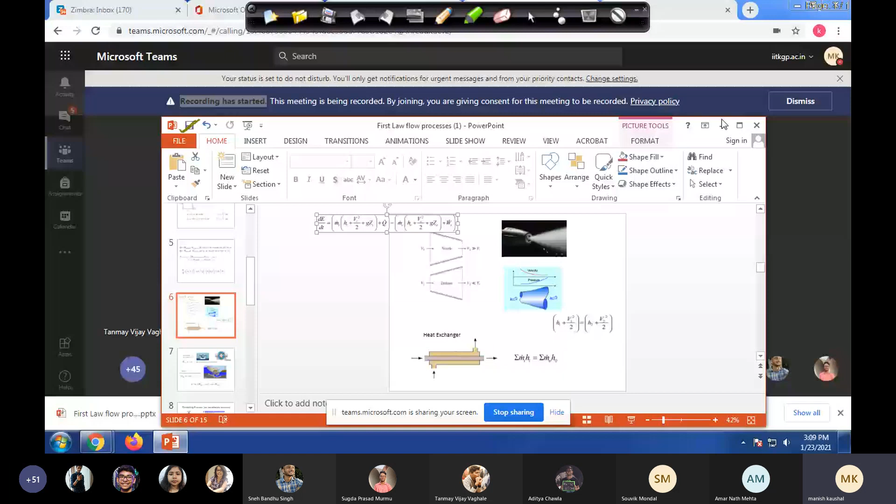Okay, so Tanmay, we derived this energy equation in the last class, right? Yes sir. So now we are going to interact for the next 5 minutes and see the application of this master equation for flow processes, and you will find there are so many industrial devices on which we can use this equation.

So we assume, just for simplicity, that most such devices work in steady state. Not always, but since we are engineers and need a rough estimate, we are assuming steady state. It may not be a safe assumption in all cases, but mostly. So what you see here is a nozzle.

Let me show you how this nozzle works. The top one is nozzle, can you see Tanmay? The animation? Yes sir. So what is happening is the area of cross section is getting narrower as you move towards the flow direction, and it leads to increase in velocity. As you can see in the left hand schematic, V2 is very, very greater than V1. So that is called a nozzle.

So in a nozzle, why do we use it? To increase the velocity significantly. Can you give a practical example of a nozzle from real life? Garden hose, yes very good. So when you want to sprinkle at a long distance or cover an area, this nozzle helps. Sometimes we also use it for atomization, because velocity is so high that molecules get detached from each other, like a small lump of masses breaking up, as in a fountain. So atomization of fluid molecules, you can use a nozzle for that purpose.

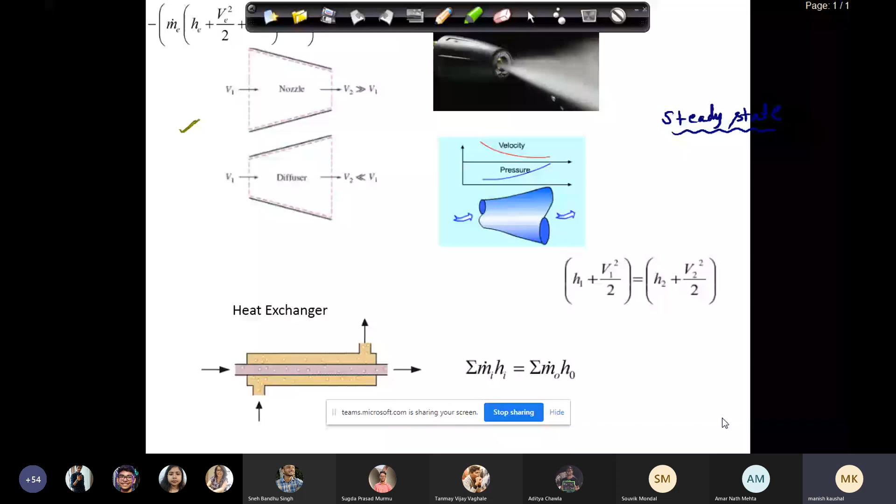So now let's write down. Just below we have the diffuser. Diffuser means this fluid suddenly opens to a larger cross section, so velocity drops down significantly. So this is nozzle, and this is diffuser.

As we discussed, if you remember, if we assume that this nozzle is working in steady state, then what will get cancelled?

At steady state, the left hand side of the equation, dE by dt, will be 0. Now you assume steady state for the nozzle.

Either you can assume it's an adiabatic nozzle, meaning completely covered so there's no heat transfer, or this process is so fast that safely you can assume it's adiabatic.

So then what will it lead to in this equation, Tanmay? Q dot is equal to 0.

Good. And we discussed that since there is no difference in elevation, what will go? So Z1, GZ1 and GZ2 will be gone, okay, right? Yes, fine.

And what about this W dot S? That will be 0 because there is no shaft work, no rotor, right? Yes, so this is gone.

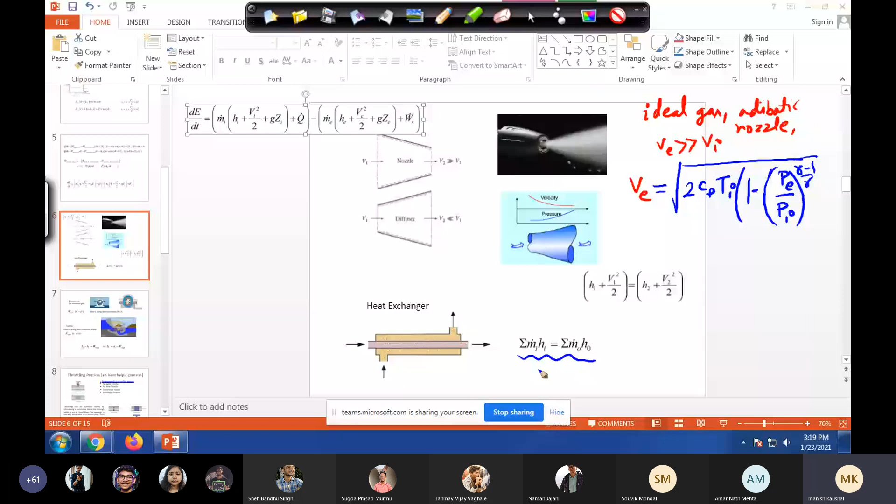Similarly, a problem can be asked on diffuser also. Then we have seen heat exchanger also, and if heat exchanger, the heat interaction is taking place within the system itself. So if you talk about heat exchanger, Q dot is 0, this is 0, all other things are 0. We assume either V inlet equal to V outlet, because generally we use pipe of uniform cross section, or you can simply say velocities are not important in a heat exchanger, they are not flowing at very high speed, so you can ignore this kinetic energy. And of course this elevation is also almost identical throughout the heat exchanger, so we are left with this. And if you have multiple inlets and outlets, there is a summation. This is also very easy.

Now I'd like to discuss something more fundamental, and then we'll go to another device. Or let's discuss the other device first, and then we'll come back to the point I want to discuss. Fine, so this is done. New page, thanks Naman. Now let's see whom we can talk to.

So I was talking to Naman Goel or Naman Jajani. Sir, me, Naman Jajani. So Naman Goel, let's discuss a few things with you. Naman, can you hear me, Goel?

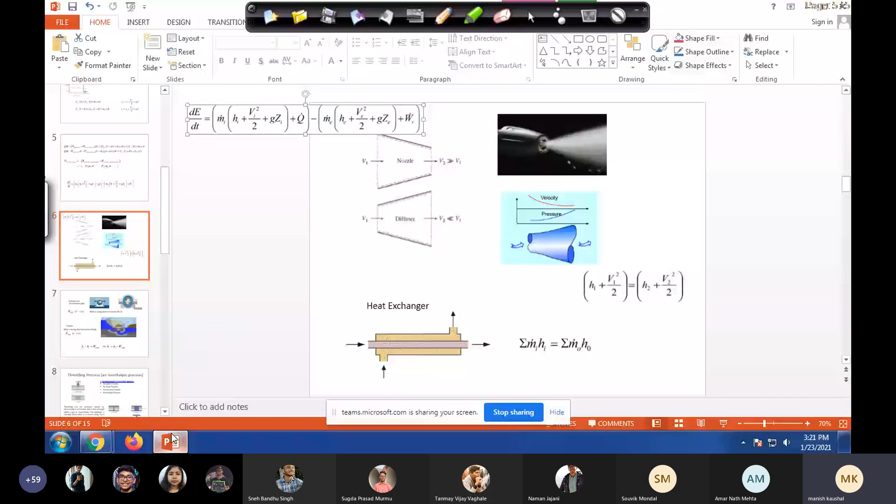Yes sir. Good. So now we are going to see something very important for a chemical engineer. Whenever you go outside, these people will expect these things from you. So let's see what that thing is. Of course nozzle and diffuser is important. Now another very important device you will see is compressor. You will also hear a similar kind of name, pump.

So does anyone have an idea what is the difference between compressor and pump? Yes sir. Am I disconnected or connected? I am connected, right? Naman, can you hear me? Yes sir, now I can hear you.

So the difference between compressor and pump is as follows. Compressor is generally used for gas, remember, because here we compress the gas. Pump is for liquids, we pump the liquid, because generally liquids are incompressible as compared to gas. So then you pump the liquid so that it can move forward. So that is the difference between compressor and pump. But equation-wise, energy equation-wise, there is no difference, and we will see how.

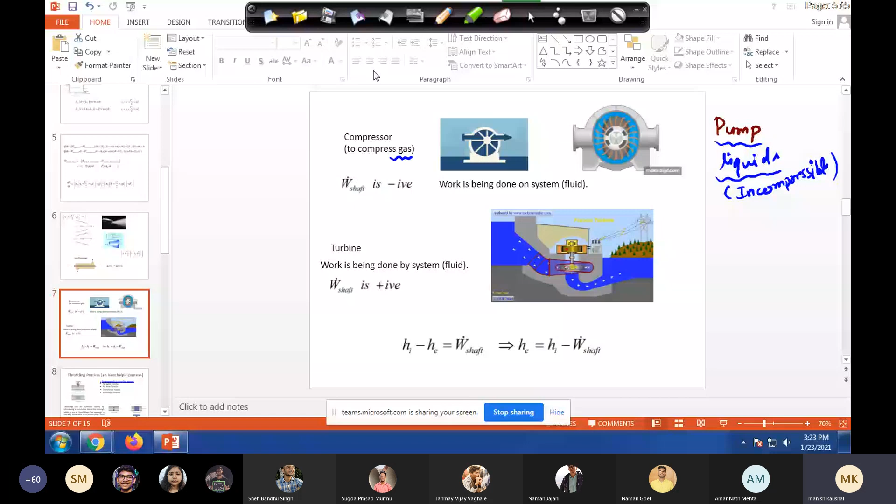So now Naman will help us. Let's bring down this energy equation here, for control volume. Before we move ahead, I'd like to show you how this works, see it carefully Naman. You only see the top two diagrams.

This compressor is working. Naman, you have to respond. Can you see how this compressor is working? Yeah, what is happening?

Consider it as a job interview. You have to be a bit extrovert. Okay, so what is happening? What do you think?

So it's the structure of this rotor, special structure of this rotor, which always traps some gas molecules, right? Due to this blade structure, every time some gas gets trapped between the two fan blades, and then it gets compressed because it has to come out with the smaller volume.

Or you can say that by this way, we always trap the gas molecule and send it to a tank. So you keep on sending the gas into the tank, and if you keep on sending, there will be too much pressure. That's how we compress the gas. You got the point? So this is compressor, right, Naman?

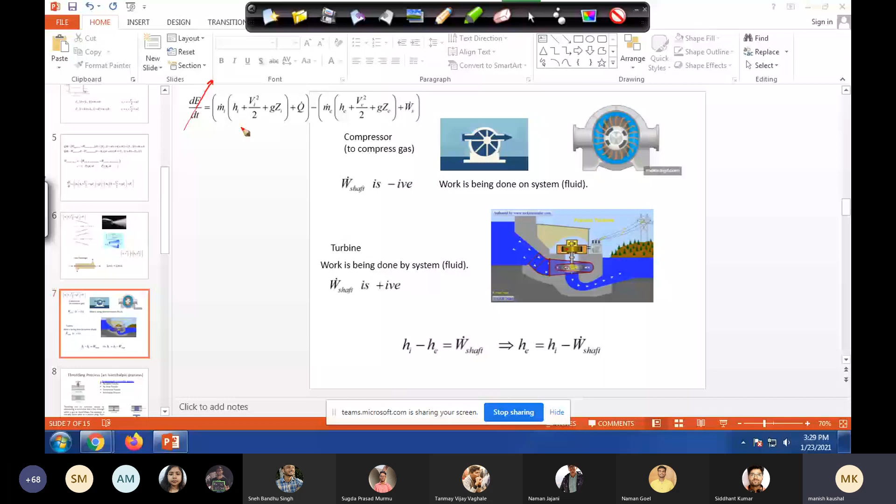Okay, so I am writing rough questions, and whatever I am writing is valid for your exams, because we are doing approximated analysis, right? We are discussing simple cases, and that's how this whole industry works - this industry of compressors, pumps, turbines. We are not looking for very exact analysis, just a rough estimate of energy.

What do you think about Q dot? So generally we say that the process is very fast, or the heat losses are not so significant. So this is also gone, right?

What about elevation? So generally we assume that they are almost at the same level, both at the same elevation. Yeah, so that will cancel too.

Now, I think I missed something here. Since we are at steady state, right, what is the relation between MI dot and ME dot? Anyone? So they would be same, right? So that will be same, time right?

This time you cannot take it out and say it's zero because there is a WS. So the terms which are surviving now are this one, this one, this one with MI and M dot. So what mistake I have made here - I have to write M dot, the throughput. This is M dot, overall throughput or mass flow rate throughout this device. So this is the equation for compression.

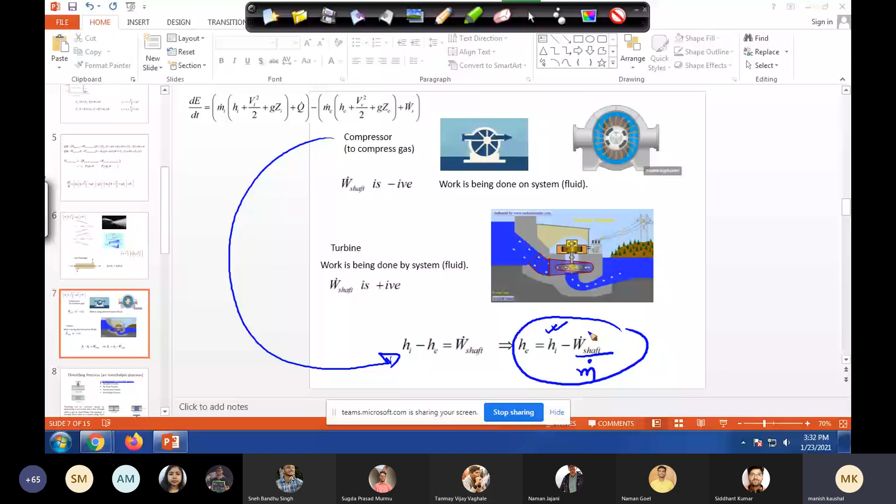This I am talking about compressor. So you have some enthalpy HI at inlet, right? And then W dot shaft is negative. That's what you said, right? You got convinced also, so negative.

It means the exit gas will have more enthalpy, which is according to expectation. If something is coming with some enthalpy, and you are working on it, providing energy, the exit enthalpy should be greater than the inlet enthalpy, right? Not very greater, just greater than. You got it? Yes sir, clear? Got it, okay thank you.

Now I'll go to someone else. Thanks. Now we'll go to turbine. Let me see with whom.

So Rakshit, you can hear me? Rakshit. Acha, Pratik, you can hear me? Pratik Kumar. Pratik. Yes sir, yes. Sorry, I'm a bit loud, sometimes I sound a bit louder. Don't mind it. Okay.

So now we are going to discuss turbine. So now you see this diagram in the bottom, this GIF, this animation. What do you see? What is happening? Can you guess? Do you know what is the purpose of turbine? Yes sir, to produce electricity.

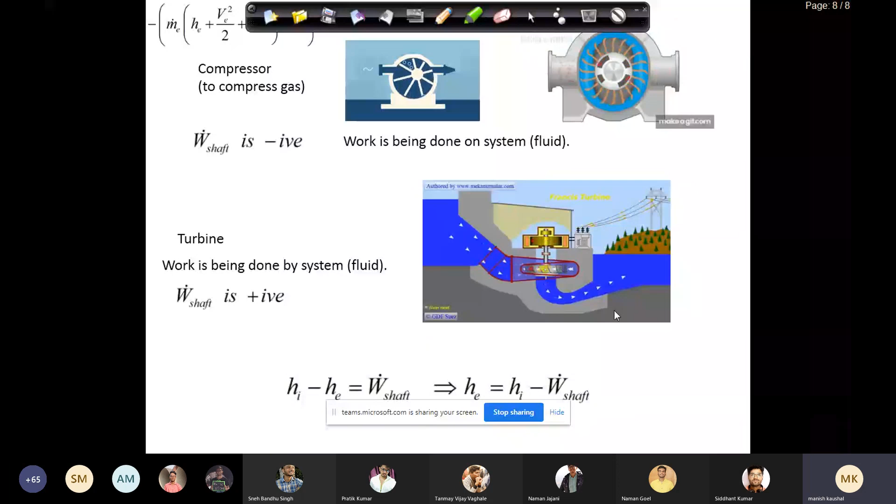So it means that fluid is rotating the turbine, right? Yes sir. So it means this time fluid is working, right?

Sir, if fluid is working, then it is positive. So that's what I have written, right? Yes, but otherwise there is no difference in the equation. Same equation is valid for turbine also.

Yes sir, this time since W dot, and again here it's M dot, by M dot. So since this time W dot shaft is positive, something will get deducted from your inlet enthalpy, right? Yes sir, and that's what we expect, that since your fluid is working, that part of energy is going to electricity, not 100%.

There is something called principle of degradation of energy, which is related to entropy. We'll see in detail in second law. So that part is going to electricity, and that's why the fluid which is coming out from the turbine, its enthalpy will be lower than the inlet enthalpy, right? Yes, understood? Great.

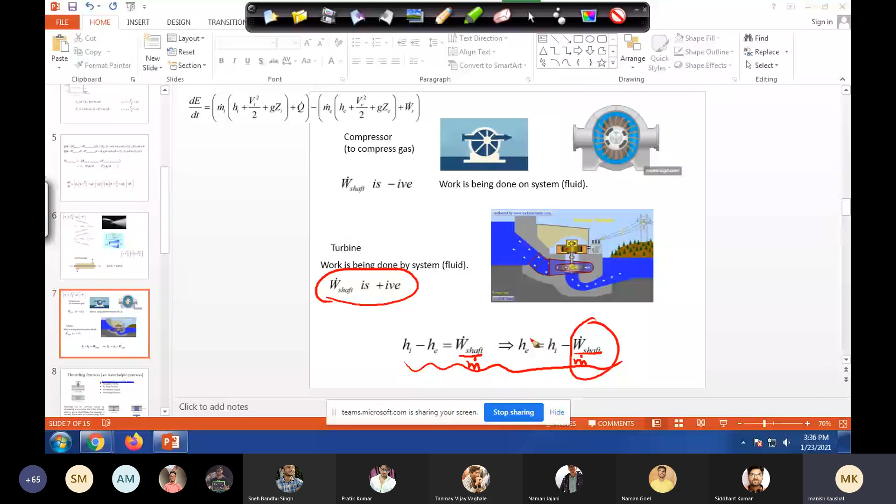So we have seen nozzle, we have seen diffuser, we have seen compressor or pump, we have seen turbine. What is interesting here, you should notice, is that in various devices, various terms are important. For example, in nozzle and diffuser, what is important is enthalpy and velocity, kinetic energy, right?

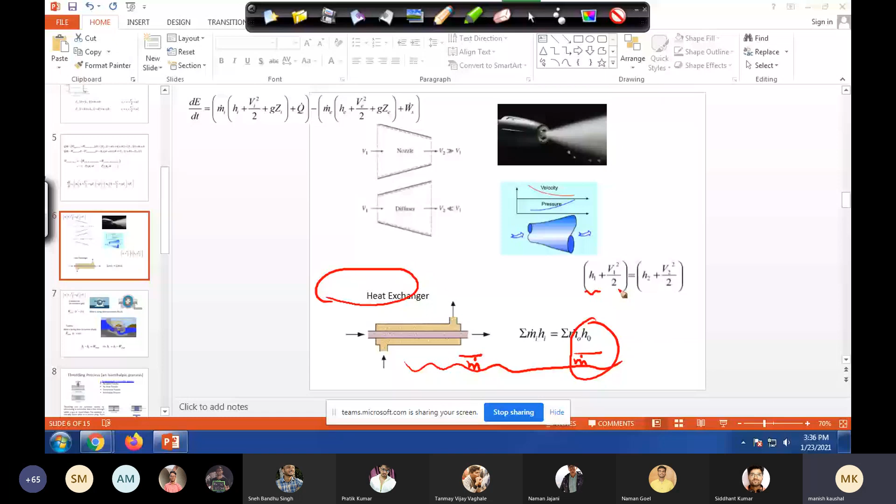So in nozzle and diffuser, what is important is enthalpy and kinetic energy. Whereas in heat exchanger, only enthalpies are important, and of course mass flow rate. And then when we go for compressor and turbine, what generally is called shaft-based devices, here apart from enthalpy, what becomes important is shaft work.

So you have to notice one thing: enthalpy occurs in all these equations, and that's why as a chemical engineer, enthalpy becomes very important for us, especially in thermodynamics. Enthalpy plays a major role.

Who's calling me? Sir, I have one doubt. Yes please. Sir, in heat exchanger, since we are working at steady state, mi dot equals me dot. So that simply means hi equals he?

Why so? No, it's in the previous page of heat exchanger, where you have written summation mi dot hi equals summation mo dot ho, fine. No, but this is only for a heat exchanger, na? Yes sir. Oh, you are saying mi dot equal to m dot?

No, no, no. See, that is valid for one pipe, right? Here in heat exchanger, you have always two pipes. In other devices, you have only one pipe, one flow line, na? But here you have multiple flow lines. So that is the difference.

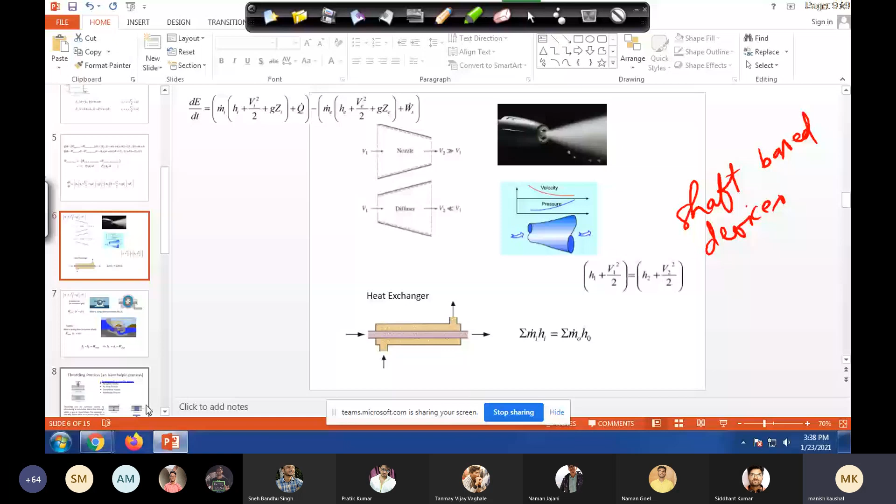Okay, so don't forget to correct it, it's W dot shaft. So what I was saying is that this enthalpy occurs everywhere, and that's why in thermodynamics we are used to make tables in terms of enthalpy. So in all these equations, enthalpy occurs.

Now, whether this enthalpy change will be due to heat exchange or due to shaft work, or it will change the kinetic energy, based on that we have various devices. In fact, for various devices, we got these various cases. Now, something very important.

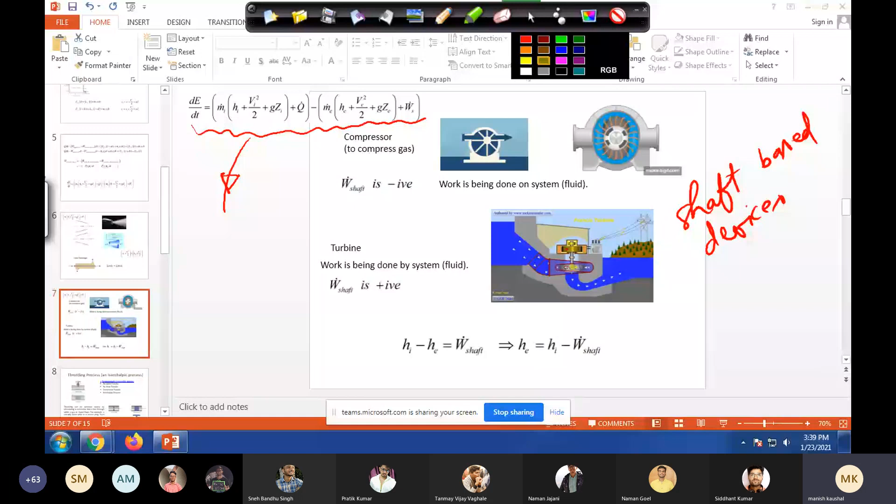We will see whether we can reach from here, this thermodynamic equation, to - have you ever heard any other equation similar to this? Bhavna, you are there? Hello?

So have you ever seen any other equation? Not very similar, but something like this - it's an energy equation. Any other energy equation? Yes sir, we have seen Bernoulli equation, have similar terms.

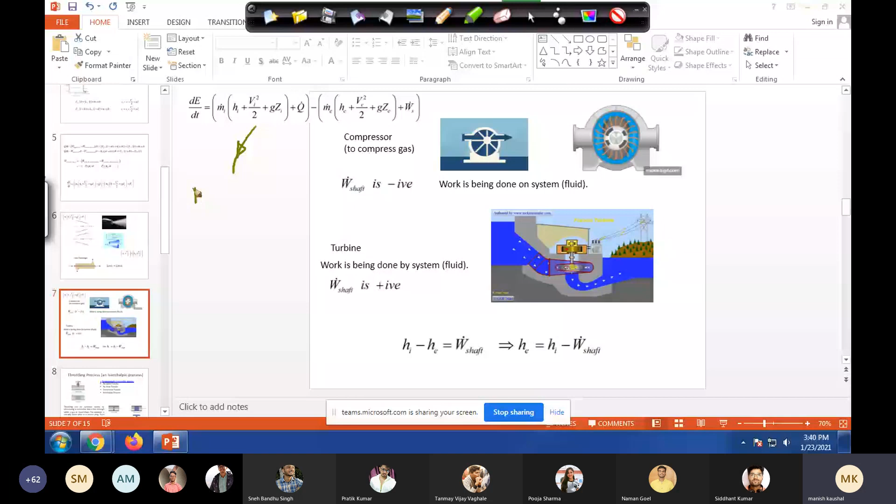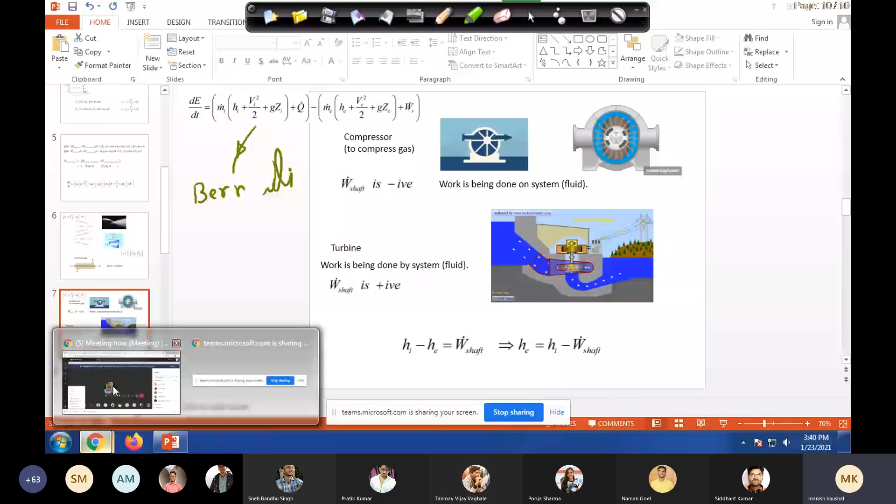Good, Bernoulli equation. So let's see, by the way, what is it's spelling, right? I always get confused, is it O? Is it correct or wrong? Bernoulli's - can you? I always get confused with this spelling of Bernoulli. Let's check it, I have doubt. I tried many times, but every time I forget the spelling of Bernoulli.

Okay fine. So let's see whether we can reach to this equation or not, and I will show you something very interesting here. Of course, in Bernoulli equation, we assume steady state, incompressible. Anything else you think? The assumption, if anyone remembers. If not, we will see what we need to add here. So I thought I should show you that from here also we can reach to Bernoulli equation.

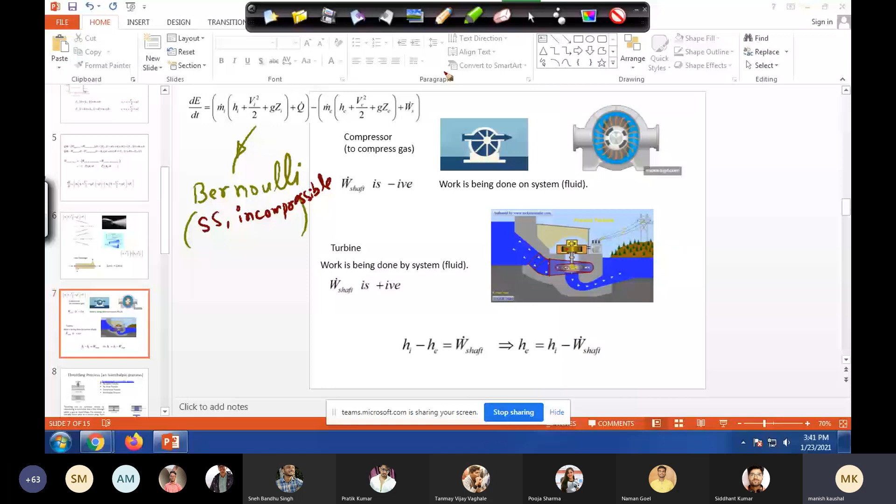Okay, let's see how. So as you are saying steady state, this term is gone. And generally we apply Bernoulli equation through one flow line. And since we are talking about steady state, this mi dot and me dot is equal to throughput rate m dot, fine.

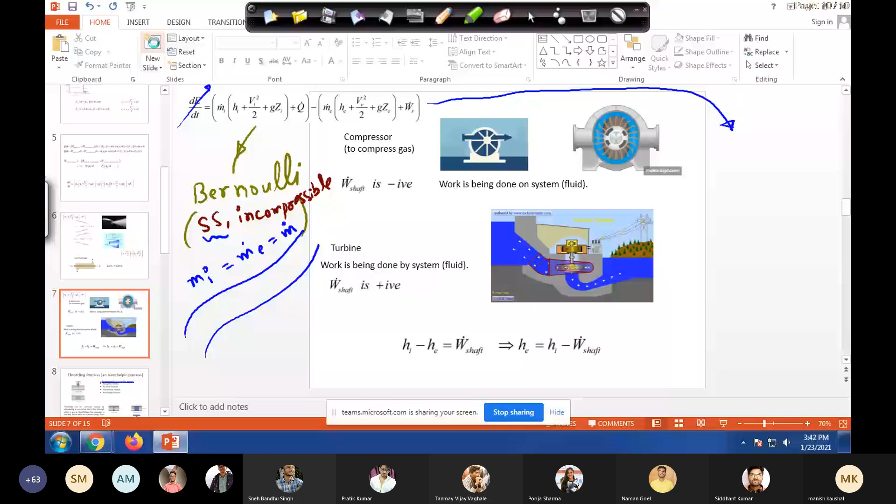Now we will write hi as - listen, see carefully, when you apply this. So write down, I need a blank page. Write it here. Let me open a new slide, it will be easier for you. Here, if I write, that will be fine. This term is gone.

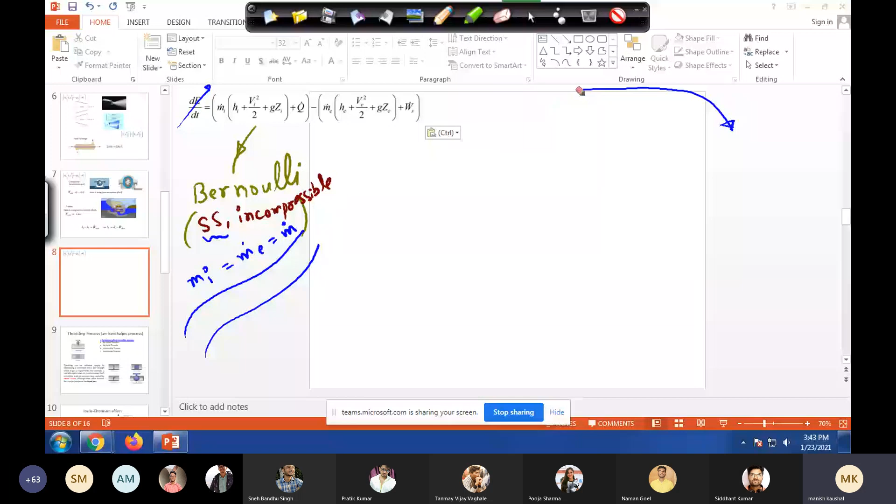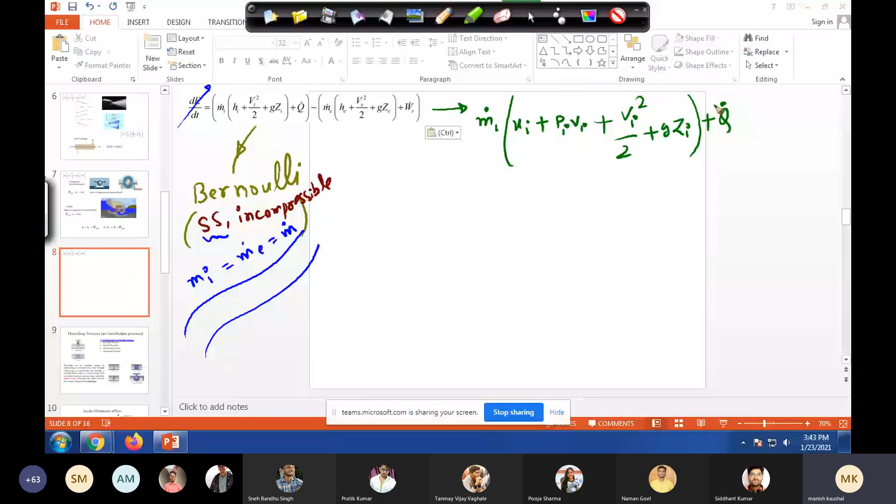Now, if that is gone, let's see what we write. So write Hi as Ui plus Pi Vi. So M dot, and write Hi as Ui plus Pi Vi. Then we have Vi square by 2 plus Gzi, plus Q dot. And this Ws also, I am using minus Ws dot. That is equal to this term, I am taking on the other side: M dot exit. And since both are equal, I'll just write M dot.

You, yes, with whom I'm interacting, I forgot. Yes, come again. I mean, what we'll write? Hello, Pooja. Yeah, Pooja. Yes.

Yes sir, Ue Ue plus Pe Ve plus Ve square by 2 plus Gze. Now what I'll do, I will remove this M dot. I'll divide both sides by M dot. So here also I have this M dot, and here also M dot.

Now let's say that there is no shaft work, because the principle which you remember is this Bernoulli equation. You don't have any turbine or compressor, right Pooja? You just apply it for a single flow line. So we don't have any shaft work, this is gone. We don't have any heat exchange, this is gone. So we will be left with this, see it carefully.

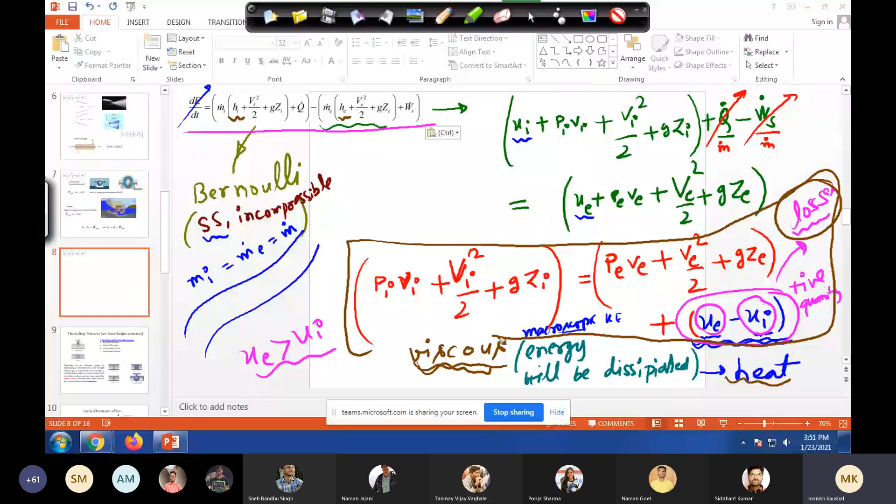Now if you assume your fluid is not so viscous, which we know as inviscid, what does it mean? That viscous losses are negligible. In that case, which term will drop? Tanmay suggests it's the losses term, and it simply becomes Bernoulli's equation. So that's why I wanted to show you this - it was a fruitful discussion, thanks Tanmay. That's how you can see even the Bernoulli equation can start from this master equation.

So now you can see the assumptions in Bernoulli's equation: steady state, incompressible, and inviscid. It means you are assuming that your viscous losses are negligible. Otherwise, this is the master equation - this equals this plus losses. I think with this you have enough idea of the energy equation.

Great, so we have seen 4 devices working at steady state: nozzle, diffuser, pump, compressor, turbine. We have seen enthalpy is important, sometimes a shaft work term matters, sometimes kinetic energy matters, sometimes only enthalpy matters, like in a heat exchanger. Now we are going to see something more profound and more interesting and more practical.

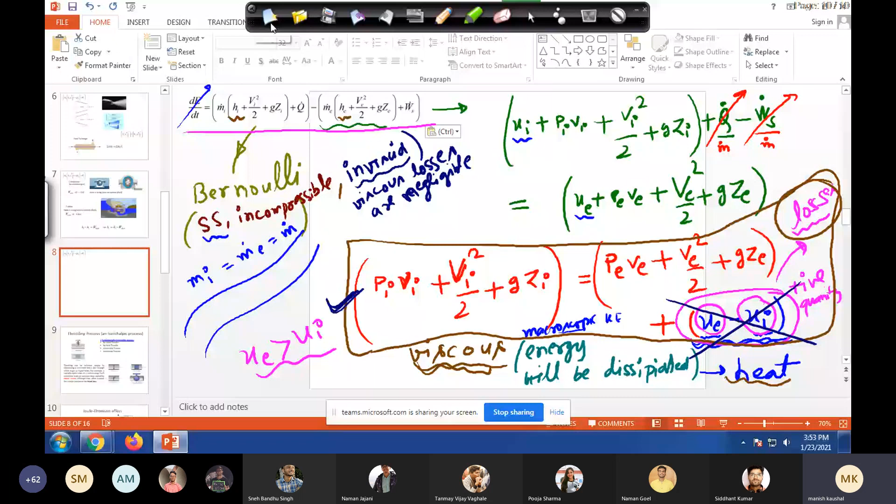In all your houses, such a device exists. I'll show you what it is. Okay, now we are going to see the throttling process. I'm sure you haven't heard about this before. We'll start it today and continue in the next class.

So first of all, what is throttling? Then we'll go to the science of throttling. What happens in throttling is that you pass the gas through a flow restriction, for example a partially closed valve, or you can pass the air through a porous plug - like this is the pipe, and you put some porous material here.

So when fluid enters here, suddenly it will go through various channels of this porous material, through a very narrow path. Whenever you offer a flow restriction to the flow, and then this flow comes out to a low pressure region - if this is P inlet and this is P outlet or P exit - in throttling we maintain P exit always smaller than P inlet. If you take a gas or any real fluid at high pressure, and pass it through a flow constriction like a porous plug or partially closed valve, and the gas exits at a relatively lower pressure region, that process is called throttling process.

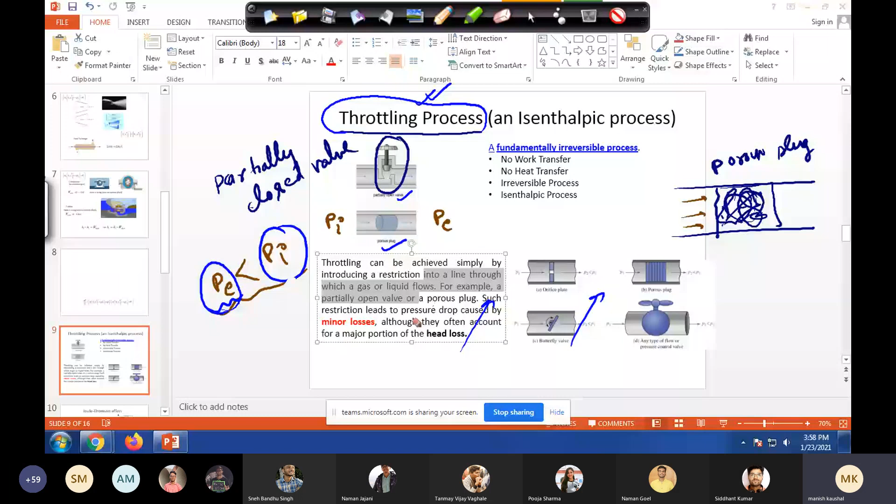Okay, so what happens here is that the inlet and outlet had same enthalpy, Hi equals to He. I am just introducing this to you, what is throttling. So throttling is an isenthalpic process. Secondly, it's fundamentally irreversible process. Why? Because it is happening very fast. You pass the fluid or real gas through a flow constriction, so you are not doing it quasi-statically. It's a very fast process, so it's a fundamentally irreversible process.

Fine. Before we go to the isenthalpic process, I have a question to all of you. Maybe Sneh and Ayush, anyone can try. Do you think that the energy equation which we have derived is valid for a reversible process? Do you think so? Anyone has any guess? For an irreversible process, is it restricted only to a reversible process? The energy equation?

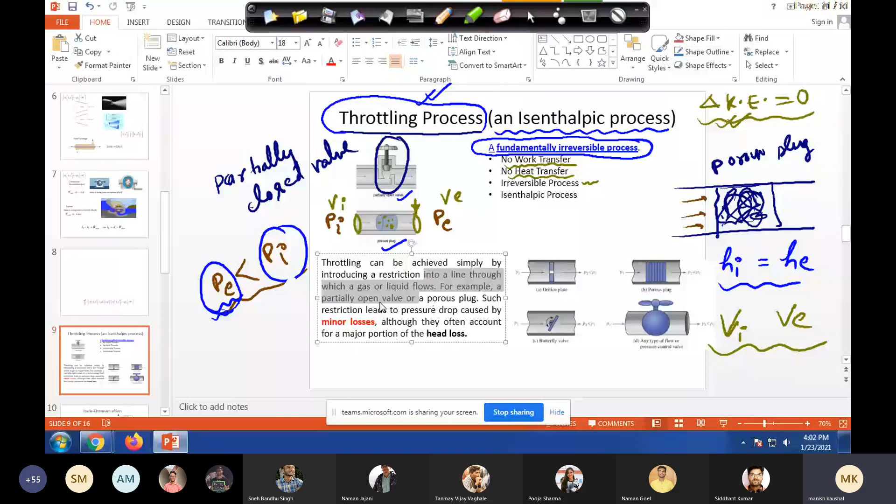So if we'll apply the energy equation, you don't need to worry about slides, I will nicely fit it and manage everything. But since we are discussing, I'm not right now. We'll finish soon. Just help me with this equation, what we'll get for this throttling process from this energy equation. As you said, there is no restriction of reversibility in this equation, we can use it safely. That's why I discussed it.

Okay, so Sneh, tell me which term will drop. Of course, steady state we assume, so this is gone. What else? d by dt is 0, Ws dot is 0, gone. Q dot gone, no heat transfer, it's simply a flow. The z1 and v1 squared terms are gone too. And then of course this is also gone, right? We said that at inlet and outlet they are almost the same. Yes sir, in the constriction velocity is very high, but once it comes out, again the velocity is almost of the same order as the inlet velocity. And steady state, so m dot I equals to m dot E, no doubt. So what are you left with?

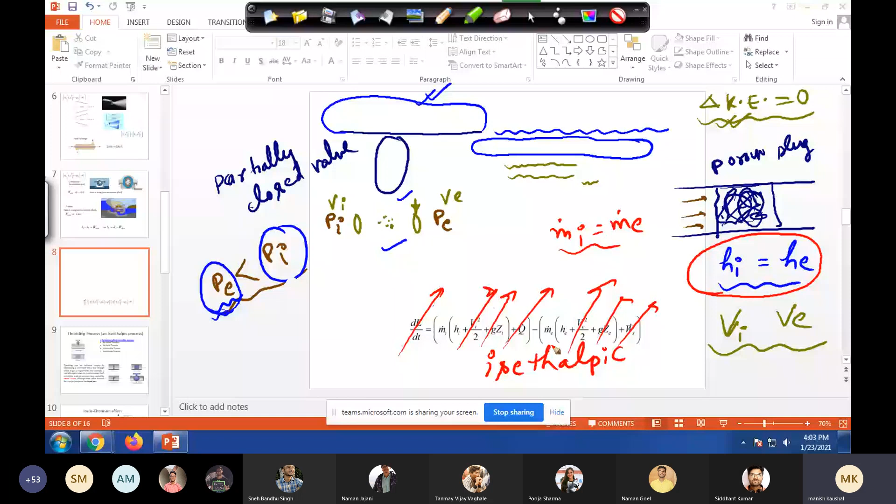Hi equal to He, and that's why it's called an isenthalpic process. Okay, isenthalpic process. And that's why if you see the slide, I have written this in the heading itself, that it's an isenthalpic process, it's an irreversible process. Okay.

Now tell me, when I say isenthalpic process, can we draw a flow diagram, let's say pressure or volume or anything, from inlet to outlet, when this flow is going from inlet to outlet? What do you think, Sneh? For a flow diagram, see what we know. Let me put this, it will help. Let's say I want to draw pressure versus specific volume. So what we know, Sneh, is P exit. Let's say a P inlet. Okay yes sir, P inlet. Of course we know, so we know V inlet also. We know P exit also.

Do we know the points in between? No, sir, always remember. When we say it's an isenthalpic process, we are only claiming that the enthalpy at inlet and outlet are equal. In between, we don't know what happens, because it's an irreversible process. You cannot draw a line like this. We have no information in between. So when you say isenthalpic process, don't get confused that throughout the process enthalpy remains constant.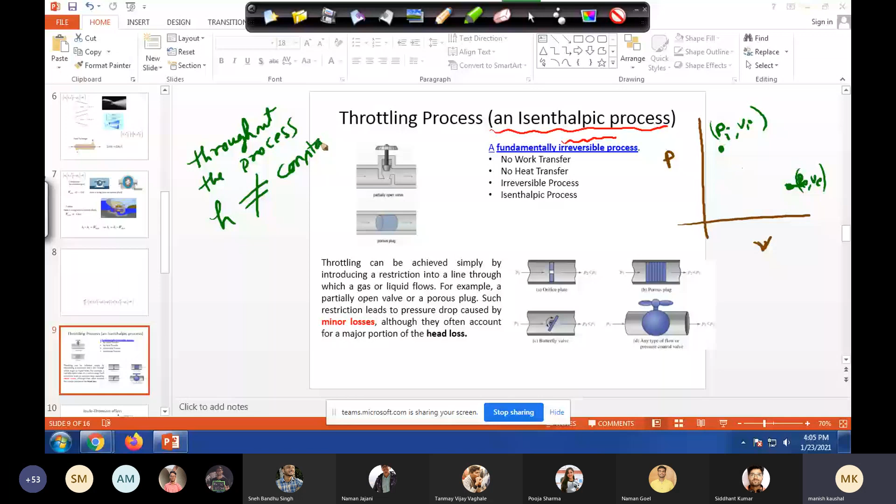No. Throughout the process, H may not be constant. We have no idea what enthalpy does in between. All we know is that Hi equals He. In that sense, we are saying isenthalpic. So never get confused that throughout the process enthalpy is constant. No. Okay, yes guys, so with this, just a small point.

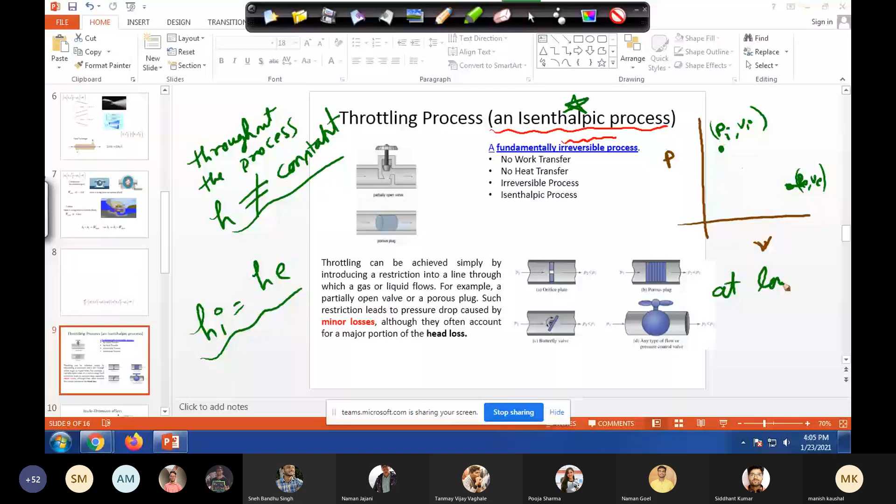I will leave this lecture at a curious point. Generally it has been seen that at low pressure... okay, let me put it properly. I will open a new page. It has been seen that if this is Pi and this is Pe, here we maintain Pe. Can anyone tell how we can maintain this Pe? We know P inlet, we are maintaining the gas inlet pressure at some value, and we are maintaining P outlet also at a smaller pressure. How can we do it? Any guess?

Let's say this is the porous plug. You can imagine how we do it. Generally what you can do is put a piston here, and put some gas from some source, and here also have a piston trapped in a chamber with some inlet. Now if you fill more gas inside, there will be more pressure, so this will pump gas through the constriction, and if you want to maintain lower pressure here, you can remove gas from this piston. So it's a two-piston system, both trapped here and here. By this two-trap system, you can maintain Pi and Pe, whatever you want. And then here is this porous plug.

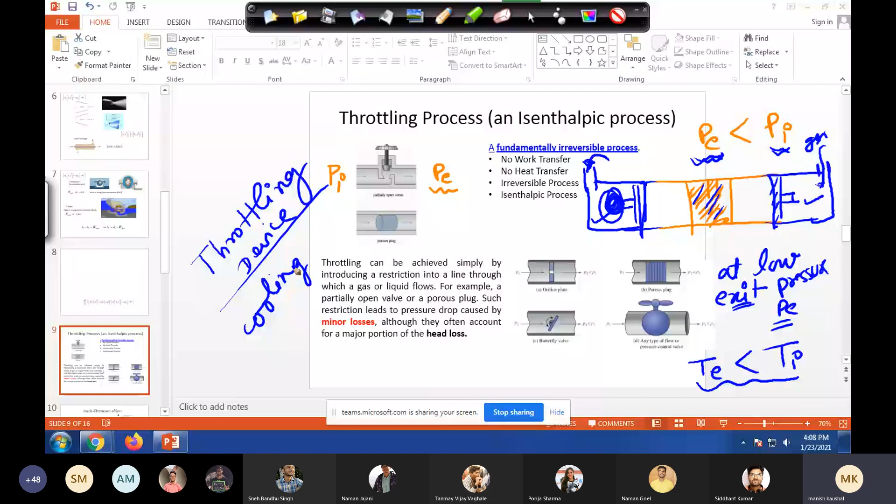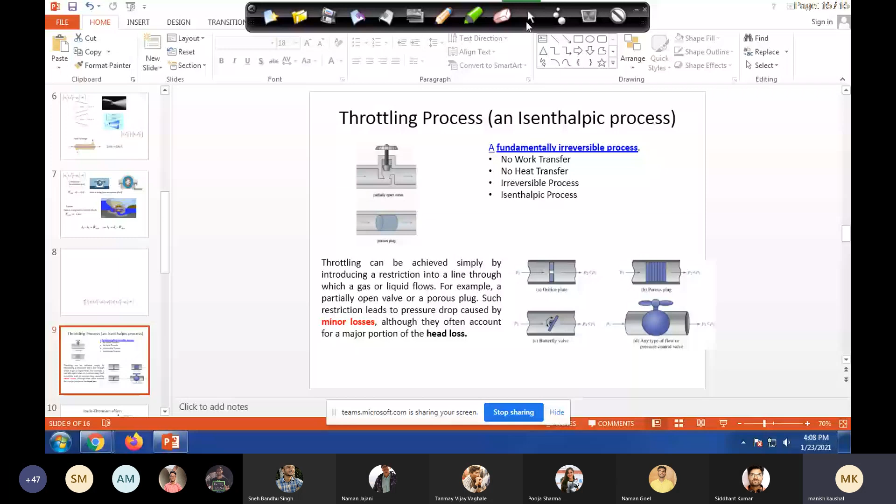After this lecture, when you leave, I want all of you to go to your fridge and check whether there is a throttling device or not. Here I have shown you, so you will see something like this. Please check, I'm sure many of you have seen this behind your fridge. Yes sir, and this is connected with a throttler. So next day when we meet, we will see how this throttling is so important for all refrigeration equipment. Otherwise it will not work.

And that's why I said throttling is very important. So today, when you leave this lecture, go and see your fridge, you will see this one. Of course you have seen where hot air is coming out, and just below you will see this throttler also. Depending on the quality of the throttler, the price of the refrigerator varies. If you take a cheap quality fridge, the manufacturer provides a very cheap quality throttler. It will not... or sometimes throttlers are uncontrolled, they cool so much that everything gets frozen in that deep freezer section.

Anyway, so that's all guys, thank you. I think that after this throttling discussion, you will feel how important this subject is. Okay, thanks.